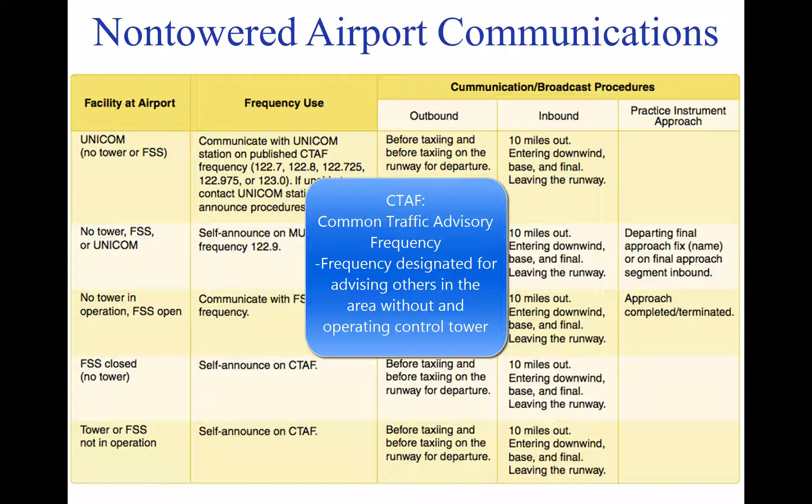The acronym CTAF, which stands for Common Traffic Advisory Frequency, is synonymous with this program. A CTAF is a frequency designated for the purpose of carrying out airport advisory practices while operating to or from an airport without an operating control tower. The CTAF may be a Universal Integrated Community (UNICOM), Multicom, Flight Service Station (FSS), or tower frequency, and is identified in appropriate aeronautical publications.

UNICOM is a non-government air-ground radio communication station which may provide airport information at public-use airports where there is no tower or FSS. On pilot request, UNICOM stations may provide pilots with weather information, wind direction, the recommended runway, or other necessary information. If the UNICOM frequency is designated as the CTAF, it will be identified in appropriate aeronautical publications.

This figure lists recommended communication procedures. More information on radio communications is discussed later in this tutorial.

Sources for airport data. When a pilot flies into a different airport, it is important to review the current data for that airport. This data provides the pilot with information such as communication frequencies, services available, closed runways, or airport construction. Three common sources of information are aeronautical charts, the Airport Facility Directory (AFD), and Notices to Airmen (NOTAMs).

Aeronautical charts provide specific information on airports. Tutorial 15, Navigation, contains more information on interpreting aeronautical charts.

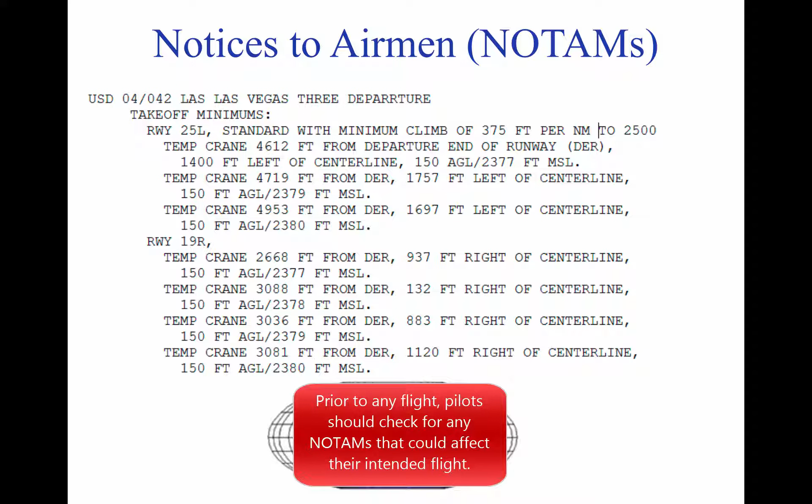The NOTAM-Ds and FDC NOTAMs are contained in the NOTAM publication, which is issued every 28 days. Prior to any flight, pilots should check for any NOTAMs that could affect their intended flight.

NOTAM-L information includes such data as taxiway closures, personnel and equipment near or crossing runways, and airport lighting aids that do not affect instrument approach criteria, such as Visual Approach Slope Indicator, VASI.

NOTAM-L information is distributed locally only and is not attached to the hourly weather reports. A separate file of local NOTAMs is maintained at each FSS for facilities in their area only. NOTAM-L information for other FSS areas must be specifically requested directly from the FSS that has responsibility for the airport concerned.

Airport markings and signs. There are markings and signs used at airports which provide directions and assist pilots in airport operations. Some of the most common markings and signs are discussed. Additional information may be found in Chapter 2, Aeronautical Lighting and Other Airport Visual Aids, in the Aeronautical Information Manual.

Runway markings. Runway markings vary depending on the type of operations conducted at the airport. This figure shows a runway that is approved as a Precision Instrument Approach runway and some other common runway markings. A basic VFR runway may only have centerline markings and runway numbers.

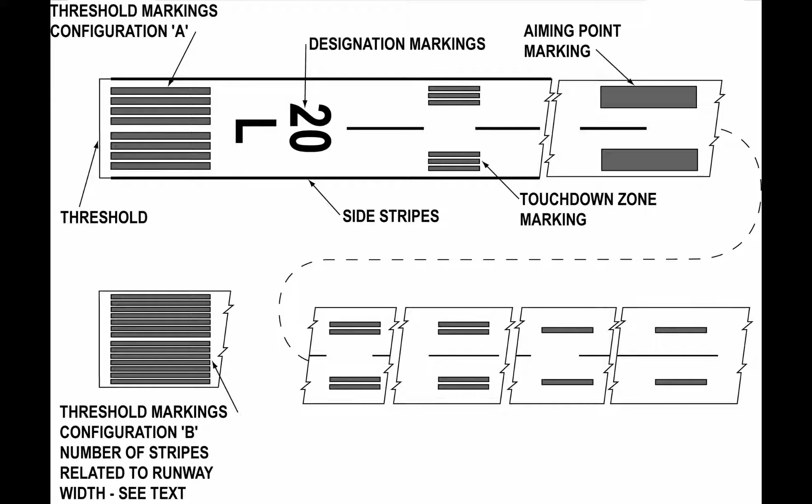Since aircraft are affected by the wind during takeoffs and landings, runways are laid out according to the local prevailing winds. Runway numbers are in reference to magnetic north. Certain airports have 2 or even 3 runways laid out in the same direction. These are referred to as parallel runways and are distinguished by a letter added to the runway number. For example, runway 36L, left, 36C, center, and 36R, right.

Another feature of some runways is a displaced threshold. A threshold may be displaced because of an obstruction near the end of the runway. Although this portion of the runway is not to be used for landing, it may be available for taxi, takeoff, or landing rollout. Some airports may have a blast pad, stopway area.

The blast pad is an area where a propeller or jet blast can dissipate without creating a hazard. The stopway area is paved in order to provide space for an aircraft to decelerate and stop in the event of an aborted takeoff. These areas cannot be used for takeoff or landing.

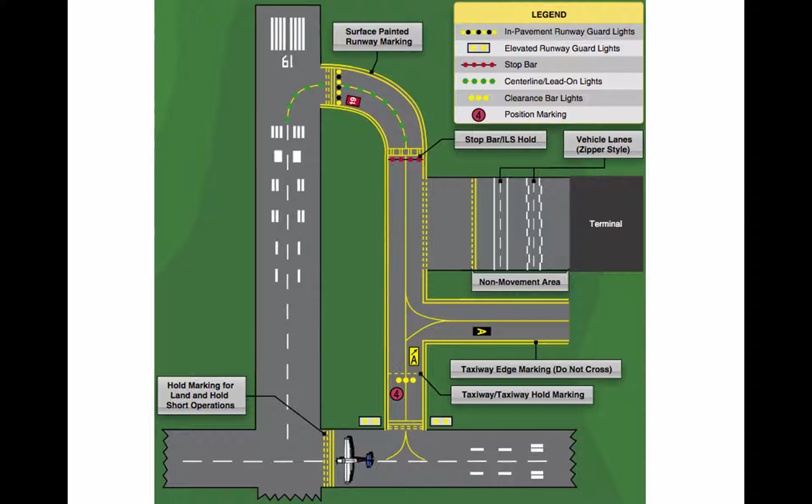Taxiway markings. Aircraft use taxiways to transition from parking areas to the runway. Taxiways are identified by a continuous yellow centerline stripe and may include edge markings to define the edge of the taxiway. This is usually done when the taxiway edge does not correspond with the edge of the pavement.

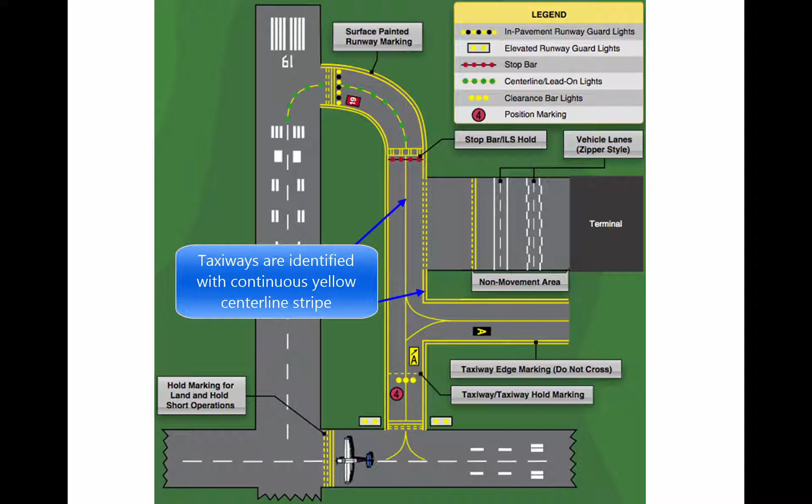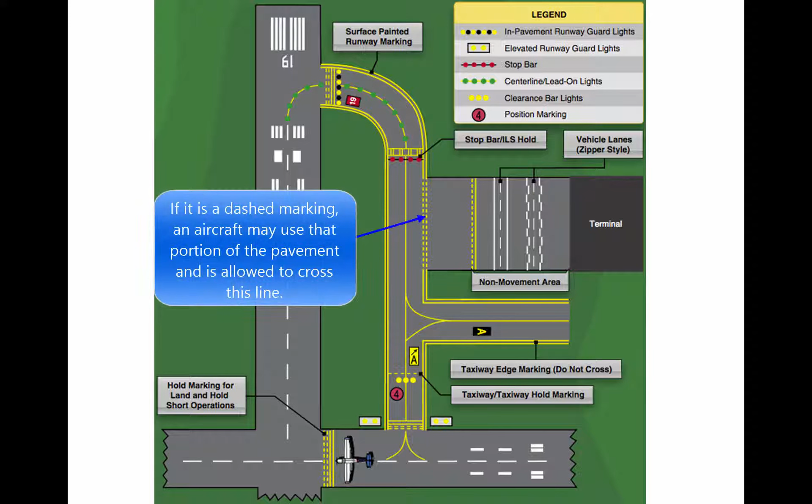If an edge marking is a continuous line, the paved shoulder is not intended to be used by an aircraft. If it is a dashed marking, an aircraft may use that portion of the pavement.

Where a taxiway approaches a runway, there may be a holding position marker. These consist of 4 yellow lines, 2 solid and 2 dashed. The solid lines are where the aircraft is to hold.

At some towered airports, holding position markings may be found on a runway. They are used when there are intersecting runways, and ATC issues instructions such as cleared to land, hold short of runway 30.

Other markings. Some other markings found on the airport include vehicle roadway markings, VOR receiver checkpoint markings, and non-movement area boundary markings. Vehicle roadway markings are used when necessary to define a pathway for vehicle crossing areas that are also intended for aircraft.

These markings usually consist of a solid white line to delineate each edge of the roadway and a dashed line to separate lanes within the edges of the roadway.

In lieu of the solid lines, zipper markings may be used to delineate the edges of the vehicle roadway.

A VOR receiver checkpoint marking consists of a painted circle with an arrow in the middle. The arrow is aligned in the direction of the checkpoint azimuth, allowing pilots to check aircraft instruments with navigational aid signals.

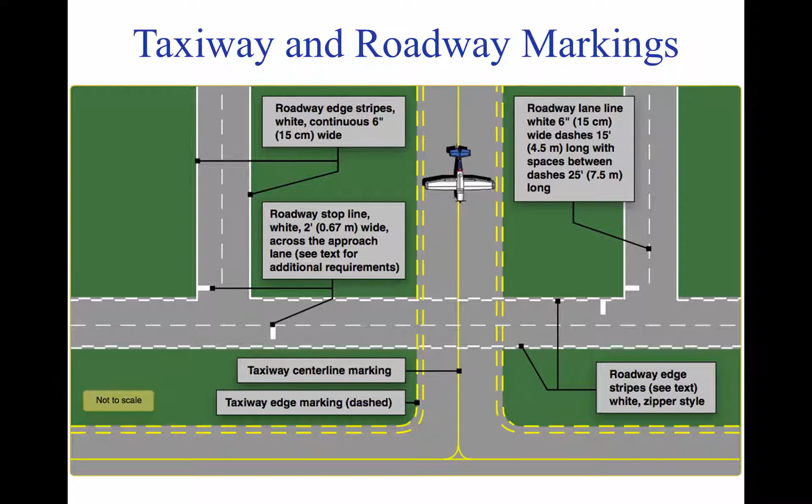A non-movement area boundary marking delineates a movement area under ATC. These markings are yellow and located on the boundary between the movement and non-movement area. They normally consist of two yellow lines, one solid and one dashed.

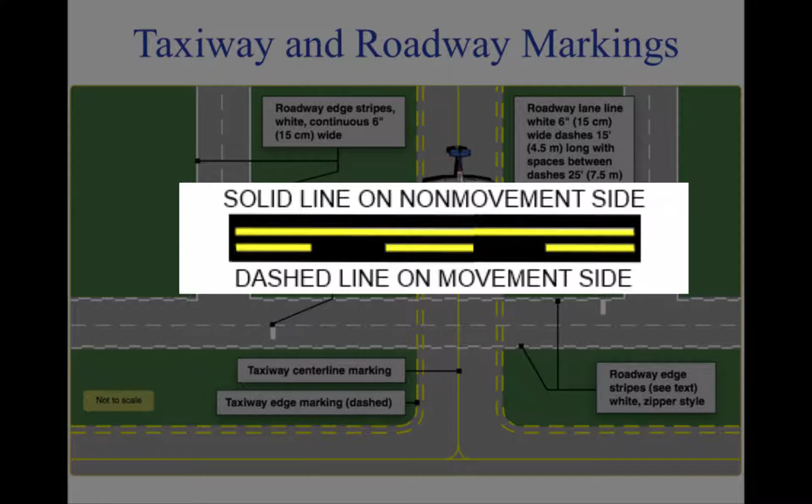Airport signs. There are 6 types of signs that may be found at airports. The more complex the layout of an airport, the more important the signs become to pilots. This figure shows examples of signs, their purpose, and appropriate pilot action.

The 6 types of signs are mandatory instruction signs, red background with white inscription. These signs denote an entrance to a runway, critical area, or prohibited area.

Location signs, black with yellow inscription and a yellow border, no arrows. They are used to identify a taxiway or a runway location, to identify the boundary of the runway, or identify an instrument landing system, ILS, critical area.

Direction signs, yellow background with black inscription. The inscription identifies the designation of the intersecting taxiways leading out of an intersection.

Destination signs, yellow background with black inscription, and also contain arrows. These signs provide information on locating things, such as runways, terminals, cargo areas, and civil aviation areas.

Information signs, yellow background with black inscription. These signs are used to provide the pilot with information on such things as areas that cannot be seen from the control tower, applicable radio frequencies, and noise abatement procedures. The airport operator determines the need, size, and location of these signs.

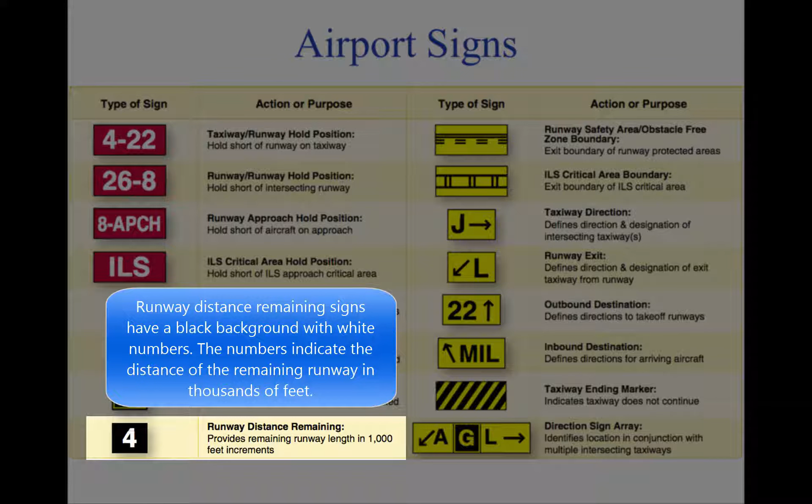Runway distance remaining signs. Black background with white numbers. The numbers indicate the distance of the remaining runway in thousands of feet.

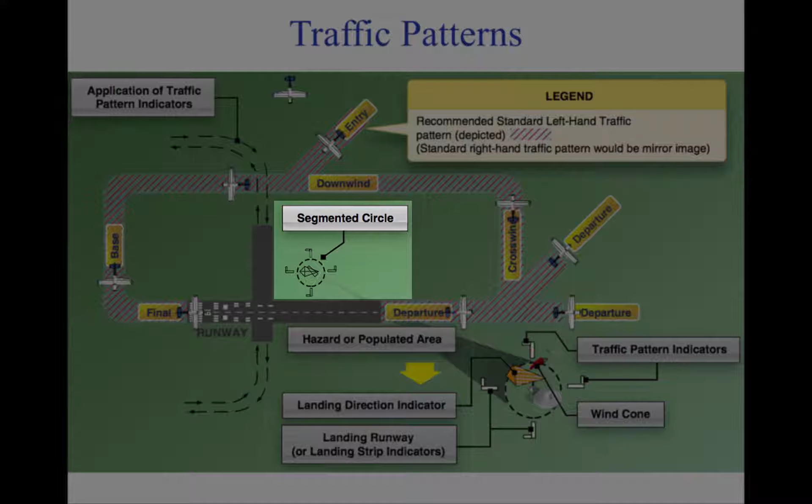Traffic patterns. At those airports without an operating control tower, a segmented circle visual indicator system, if installed, is designed to provide traffic pattern information. Usually located in a position affording maximum visibility to pilots in the air and on the ground, and providing a centralized location for other elements of the system, the segmented circle consists of the following components: wind direction indicators, landing direction indicators, landing strip indicators, and traffic pattern indicators.

A tetrahedron is installed to indicate the direction of landings and takeoffs when conditions at the airport warrant its use. It may be located at the center of a segmented circle and may be lighted for night operations. The small end of the tetrahedron points in the direction of landing. Pilots are cautioned against using a tetrahedron for any purpose other than as an indicator of landing direction. At airports with control towers, the tetrahedron should only be referenced when the control tower is not in operation. Tower instructions supersede tetrahedron indications.

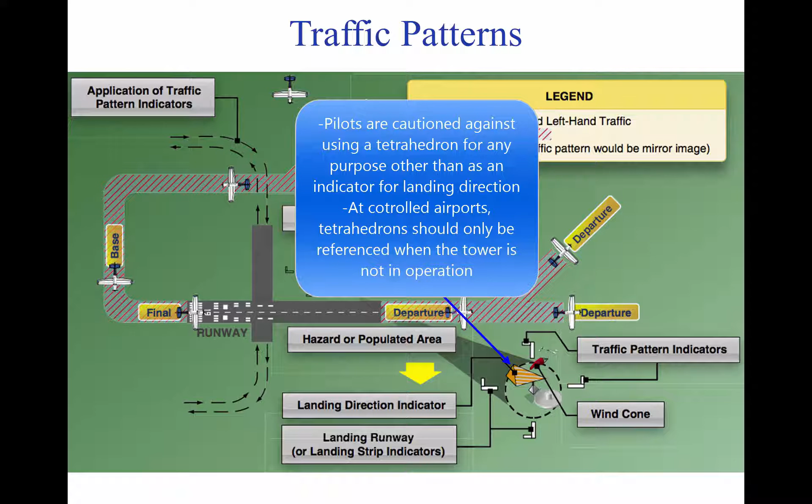Landing strip indicators are installed in pairs and are used to show the alignment of landing strips. Traffic pattern indicators are arranged in pairs in conjunction with landing strip indicators and used to indicate the direction of turns when there is a variation from the normal left traffic pattern.

At most airports and military air bases, traffic pattern altitudes for propeller-driven aircraft generally extend from 600 feet to as high as 1,500 feet above ground level, AGL. Pilots can obtain the traffic pattern altitude for an airport from the AFD. Also, traffic pattern altitudes for military turbojet aircraft sometimes extend up to 2,500 feet AGL.

Therefore, pilots of en route aircraft should be constantly on the alert for other aircraft in the traffic patterns and avoid these areas whenever possible. When operating at an airport, traffic pattern altitudes should be maintained unless otherwise required by the applicable distance from cloud criteria. Additional information on airport traffic pattern operations can be found in Chapter 4, Air Traffic Control of the AIM.

Pilots can find traffic pattern information and restrictions such as noise abatement in the AFD. The following is standard operations for flying a traffic pattern at a single runway airport.

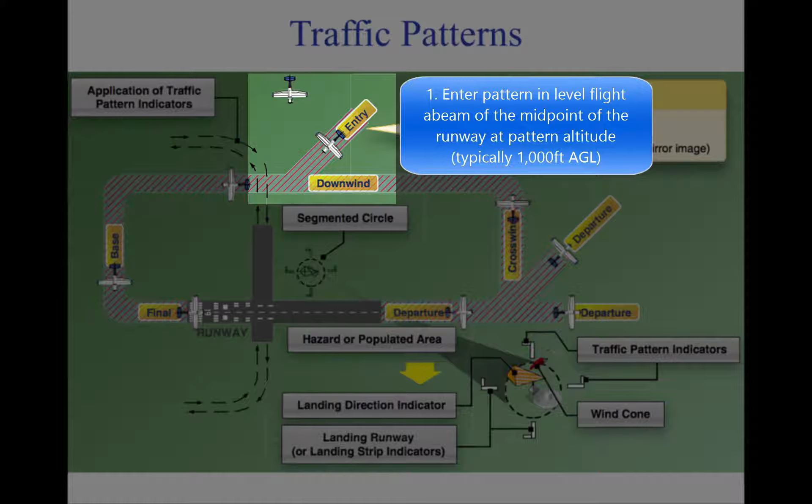Enter pattern in level flight, abeam the midpoint of the runway at pattern altitude, 1,000 feet AGL, is recommended pattern altitude unless established otherwise. Maintain pattern altitude until abeam the approach end of the landing runway on downwind leg. Complete turn to final at least 1/4 mile from the runway.

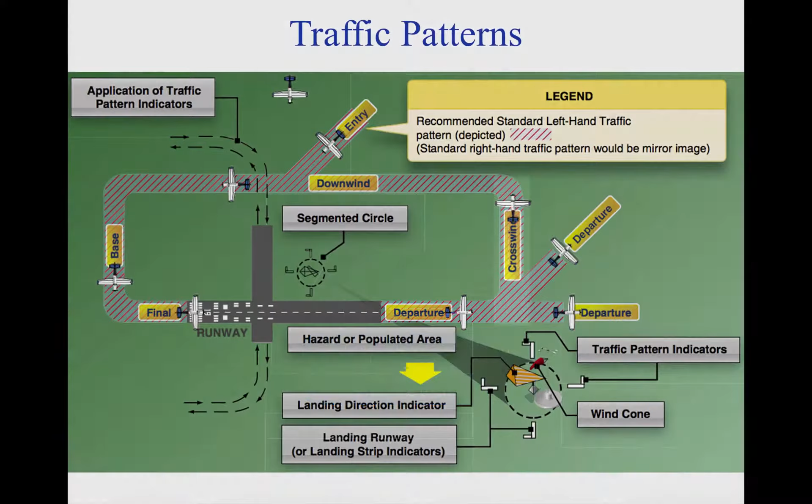Continue straight ahead until beyond the departure end of the runway. If remaining in the traffic pattern, commence turn to crosswind leg beyond the departure end of the runway within 300 feet of pattern altitude.

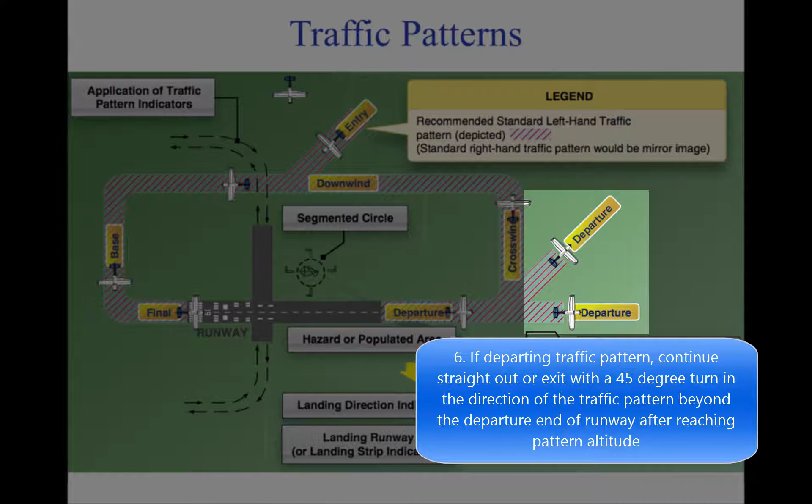If departing the traffic pattern, continue straight out or exit with a 45-degree turn to the left when in a left-hand traffic pattern, to the right when in a right-hand traffic pattern, beyond the departure end of the runway after reaching pattern altitude.

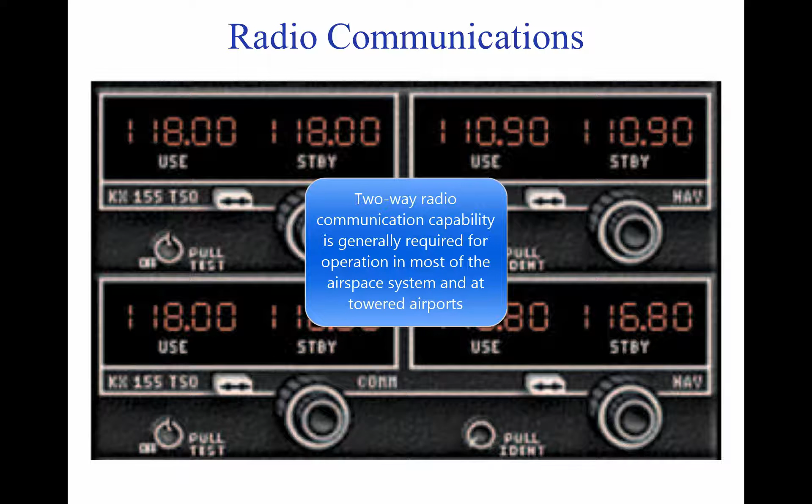Operating in and out of a towered airport, as well as in a good portion of the airspace system, requires that an aircraft have two-way radio communication capability. For this reason, a pilot should be knowledgeable of radio station license requirements and radio communications equipment and procedures.

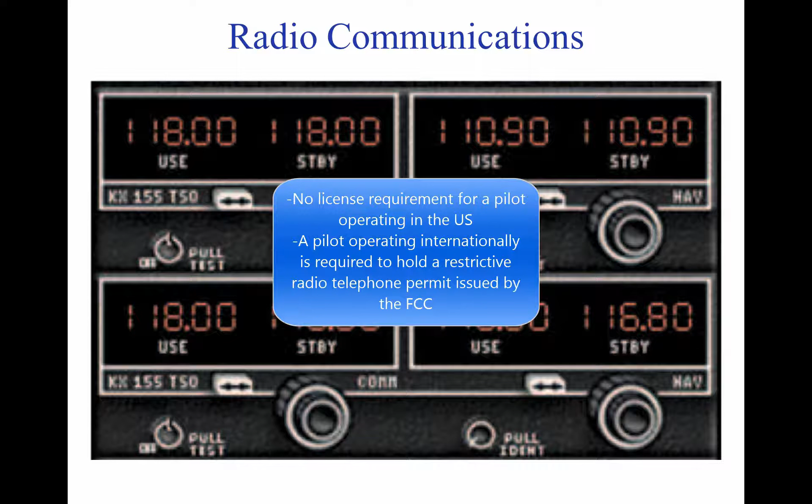There is no license requirement for a pilot operating in the United States. However, a pilot who operates internationally is required to hold a restricted radio telephone permit issued by the Federal Communications Commission, FCC. There is also no station license requirement for most general aviation aircraft operating in the United States. A station license is required, however, for an aircraft which is operating internationally, which uses other than a VHF radio, and which meets other criteria.

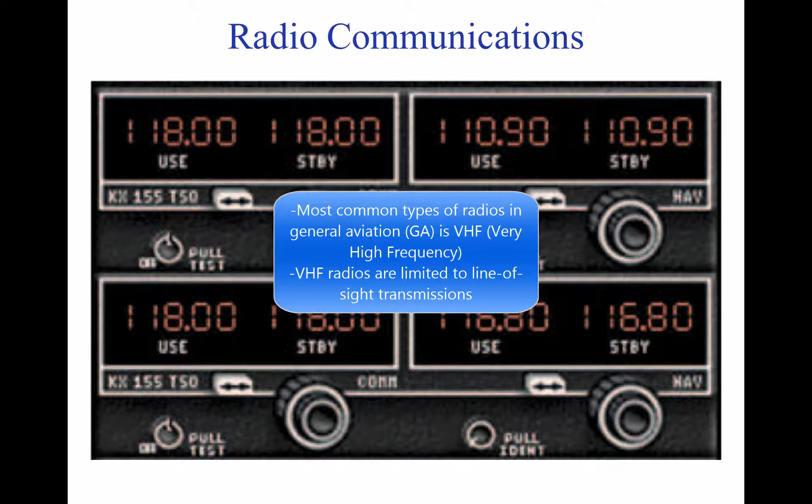Radio equipment. In general aviation, the most common types of radios are VHF. VHF radios are limited to line-of-sight transmissions. Therefore, aircraft at higher altitudes are able to transmit and receive at greater distances.

Using proper radio phraseology and procedures contributes to a pilot's ability to operate safely and efficiently in the airspace system. A review of the pilot controller glossary contained in the AIM assists a pilot in the use and understanding of standard terminology. The AIM also contains many examples of radio communications.

ICAO has adopted a phonetic alphabet, which should be used in radio communications. When communicating with ATC, pilots should use this alphabet to identify their aircraft. Air Traffic Control, ATC services.

Besides the services provided by an FSS, as discussed in Tutorial 12, Aviation Weather Services, numerous other services are provided by ATC. In many instances, a pilot is required to have contact with ATC, but even when not required, a pilot finds it helpful to request their services.

Primary radar. Radar is a device which provides information on range, azimuth, and/or elevation of objects in the path of the transmitted pulses. It measures the time interval between transmission and reception of radio pulses and correlates the angular orientation of the radiated antenna beam or beams in azimuth and/or elevation.

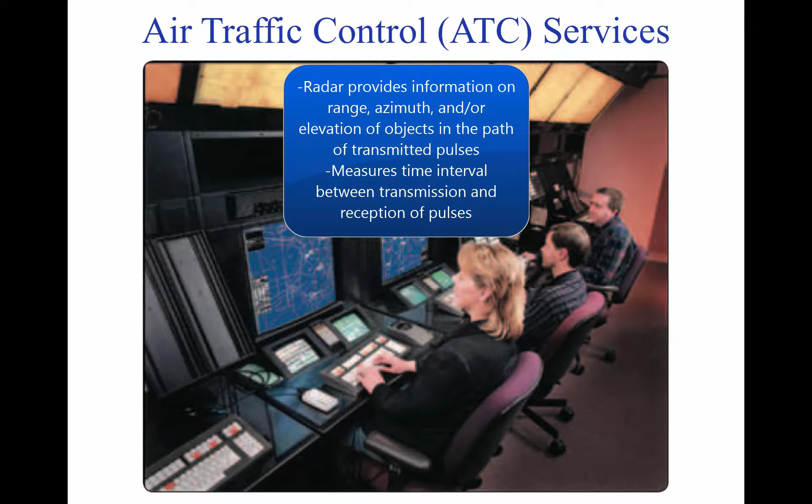Range is determined by measuring the time it takes for the radio wave to go out to the object and then return to the receiving antenna. The direction of a detected object from a radar site is determined by the position of the rotating antenna when the reflected portion of the radio wave is received.

Modern radar is very reliable and there are seldom outages. This is due to reliable maintenance and improved equipment. There are, however, some limitations which may affect ATC services and prevent a controller from issuing advisories concerning aircraft which are not under his or her control and cannot be seen on radar.

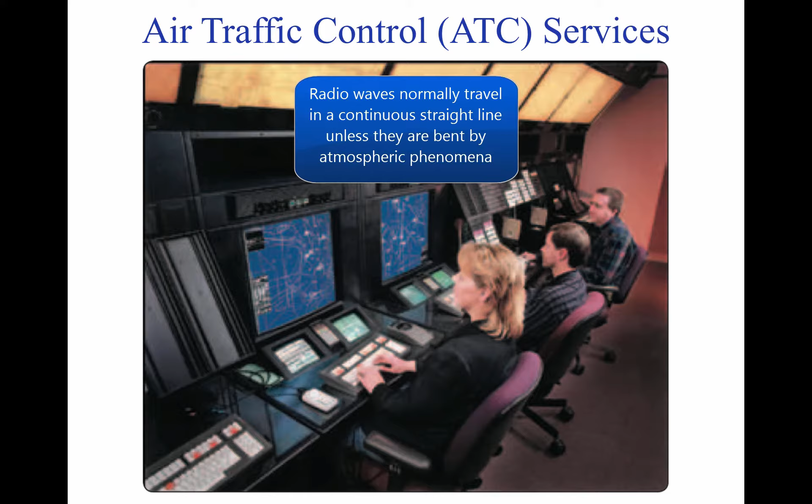The characteristics of radio waves are such that they normally travel in a continuous straight line unless they are bent by atmospheric phenomena such as temperature inversions, reflected or attenuated by dense objects such as heavy clouds and precipitation, or screened by high terrain features.

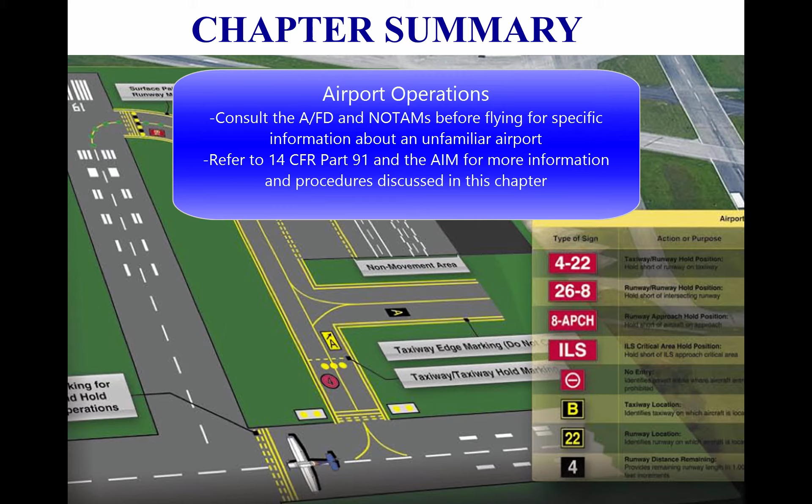This tutorial focused on airport operations, both in the air and on the surface. For specific information about an unfamiliar airport, consult the AFD and NOTAMs before flying. For further information regarding procedures discussed in this chapter, refer to 14 CFR Part 91 and the AIM. By adhering to established procedures, both airport operations and safety are enhanced.